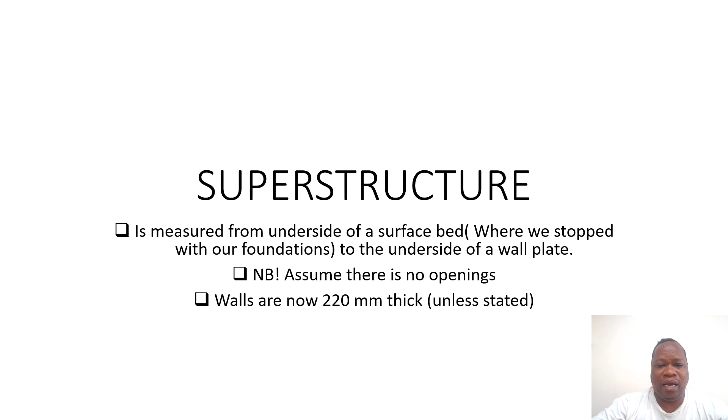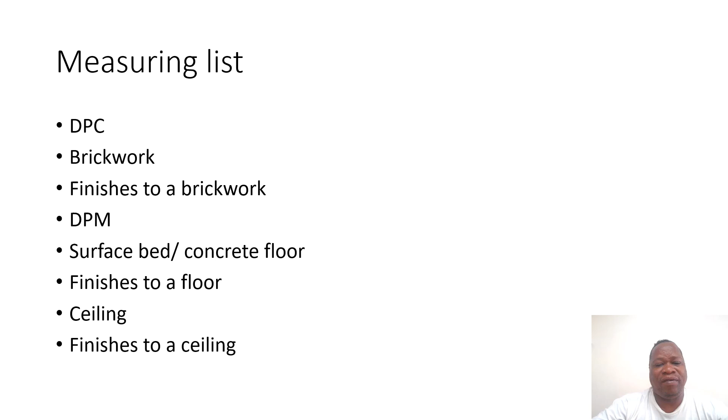Then you need to compile your measuring list. You will start with the DPC, the brickwork, the finishes to brickwork, DPM, the surface bed, the finishes to the floor, ceiling, and the finishes to the ceiling. Once you've determined those, you can measure now.

Here is the drawing showing our structure, and we have to measure the superstructure. The size of our building is 5,500 by 9,500, and the height of our wall is 2,800. Consider that we're starting from the underside. We have our surface bed, which is 75 millimeters thick.

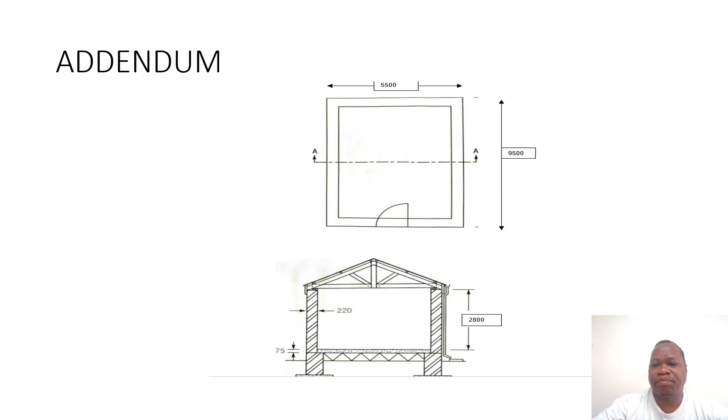On the plan, you are given the specification that you need to go through before you start working out. Your brickwork is in stretcher bond. Your wall is faced outside and plastered inside. You've got the granolithic floor finish. You've got the granolithic floor skirting.

You've got the coved cornice. You've got the rhino board ceiling. You've got H-section cover strips, and then 2 coats of internal PVA on the ceiling and the plaster. And then you've got 15 megapascal concrete on the surface bed.

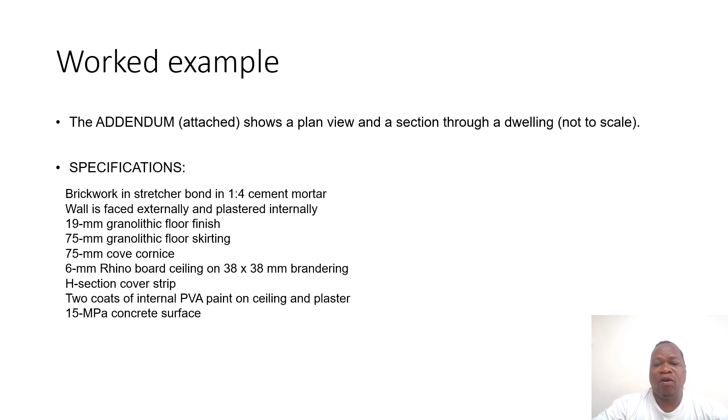Here is our worked exercise. You have to first calculate the center line, bearing in mind that our walls are now 220, not 330. It will give you those dimensions. Add 55 plus 95, times 2, subtract 4 times 220; it gives us 29,120. Then we convert it into meters. When you measure your DPC, you take the center line by the width of the wall and describe it.

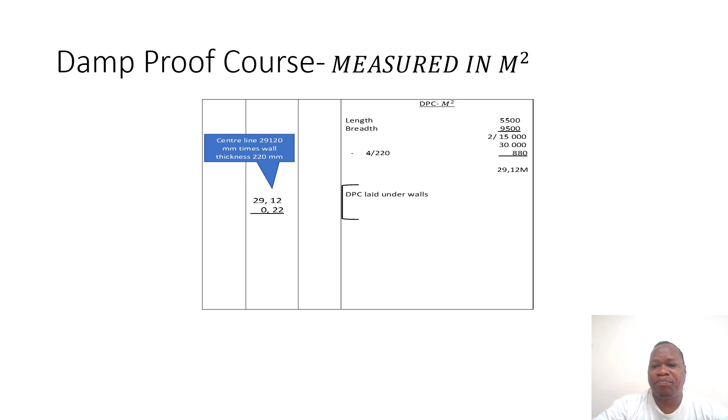Once that has been done, you can measure your sand blinding if it is shown on the plan. I assume that our sand blinding is 20 millimeters thick. I first need to know the area that will be covered by the sand blinding. The dimensions were given external to external, so I had to subtract my walls. It gave us those dimensions.

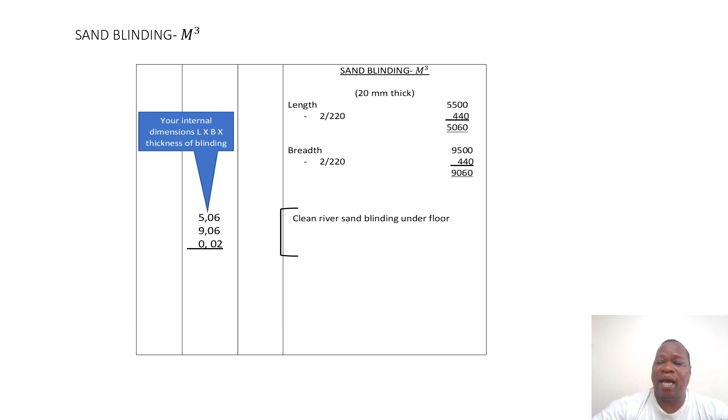That is our breadth. When you're booking it, the standard system says that it is measured in cubic meters, so it will be your internal dimensions as already calculated by the thickness of the blinding, which is 20 millimeters divided by 1,000, and then you describe it as clean river sand blinding under floors.

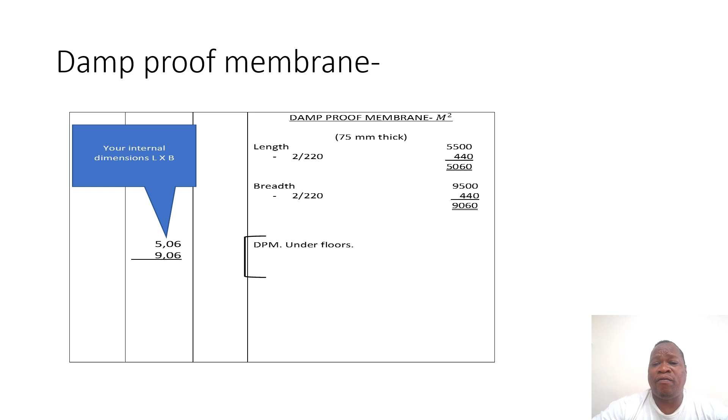Thereafter, you do your DPM. Your DPM is measured by the area that it will be covering. So in the same dimensions, it's your length times your breadth, already calculated. It's a matter of booking and describing. Once you have done that, you measure your concrete floor, which is the surface bed. The surface bed is measured in cubic meters. You already have the two dimensions, your length and your breadth.

The last one will be the thickness of your concrete floor, which is 75. Remember, we are rounding off to 2 decimal places. Once you are done with that, you describe, and then you measure.

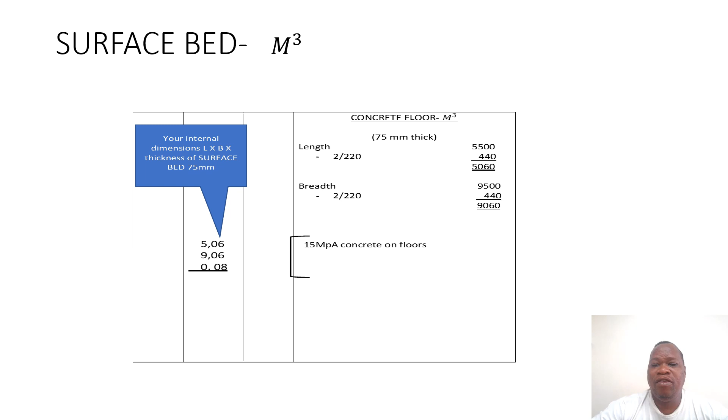The next step will be your screed. But in this case, they say it's a granolithic finish. The granolithic finish is just the finishing done right on top of the concrete, that shiny stuff. But this one now, we need to measure the screed.

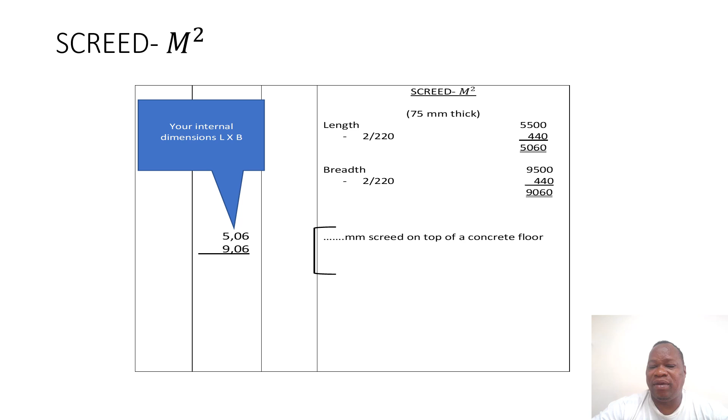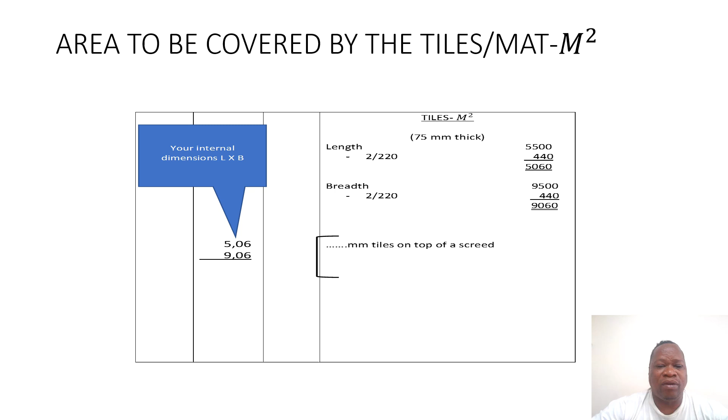Also, the screed is measured in square meters. Then you already have the dimensions. Once you have measured your screed, you can measure the finishing on top of the screed, even though on the specification it says the granolithic. So your tiles again are measured by the area they will cover. So it's the same dimensions as you've done. And thereafter, you start to do the floor finishes.

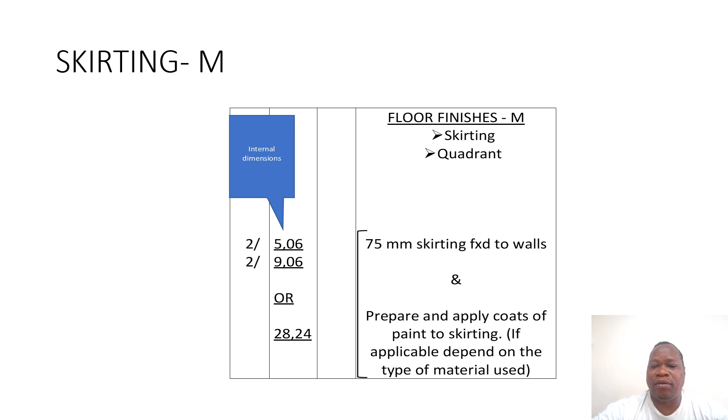Your floor finishes will be the skirting and the quadrant. So both of these finishes are measured in meters. They are linear. So you have two sides that are 5,06 and two sides that are 9,06, and then you describe it accordingly. Or you can add 5,06 and 9,06 and times it by 2. It's going to give you 28,24. So you can use any method that you think will be easier for your understanding when it comes to the calculation of the floor finishes, that is your skirting and the quadrant.

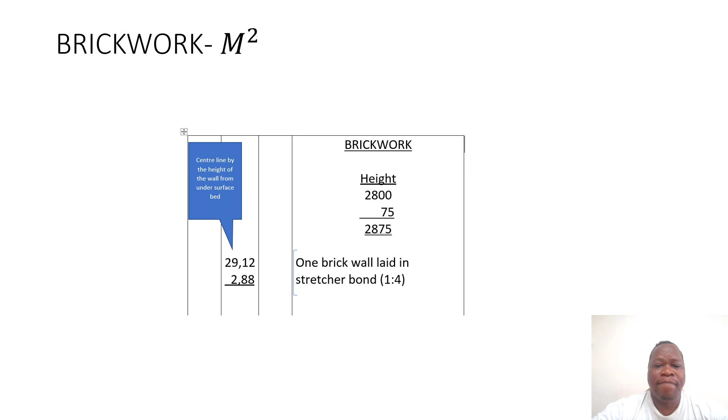Then we go again, the same thing repeatedly. So you have to measure now your brickwork. Remember, with your brickwork, you always start from where you stopped with your foundation. So we added that 75 millimeter for our surface bed, and then it gave us that height. So you take the center line first for your ordinary brick, and then you multiply by that height. And thereafter, you have to measure the finishes to your wall. So the finishes to your wall, you've got internal finishes as well as the external finishes.

So for your internal finishes, you will have those two dimensions by 2.80. That is the height from top of the surface bed to underside of the wall plate. And thereafter, the same area that is in your wall will be the same area that will be painted. Your paint will be applied on those walls. So there's no need for you to rebook this because it's going to be the same dimensions. But if you rebook it, it's still fine. Or if the examiner is asking you separately, then you're still going to be fine.

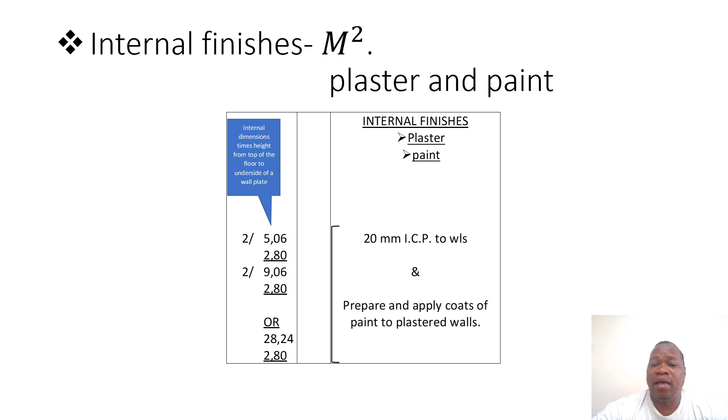Thereafter, once you are done with the internal finishes, you will have to do the external finishes. Now your external finishes are the total external perimeter of the structure. So you add all your four sides there, it's going to give you that 30,000, even though when you're calculating the center line, you've already shown it. So you can do it in two ways. You can take two sides by the height, that is your length and your breadth, same thing, or you take the total external perimeter, it's going to give you the same thing.

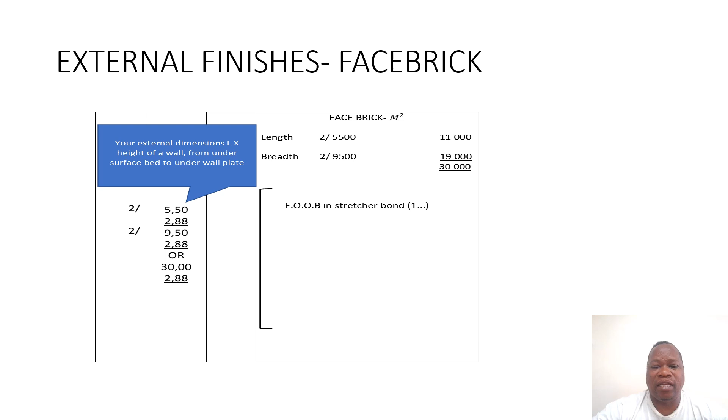Once you are done with your external finish, thereafter you measure your ceiling. Your ceiling is going to be covering the same area as your floors, so it's a matter of you booking. There's no extra calculations there. Also, don't forget to include your paint when you're measuring. Then you add prepare and apply whatever coats they give you in the specification on top of your ceiling.

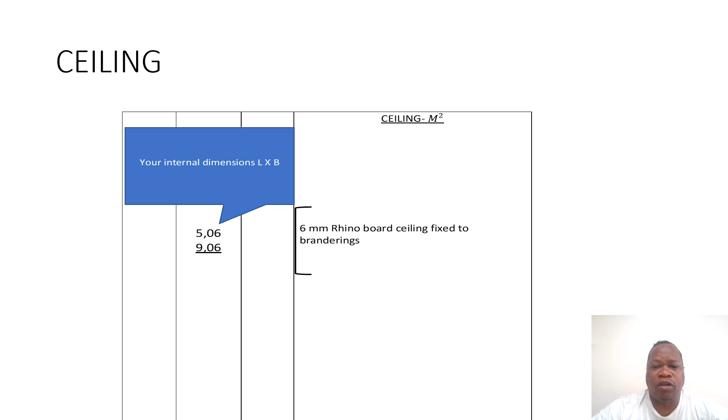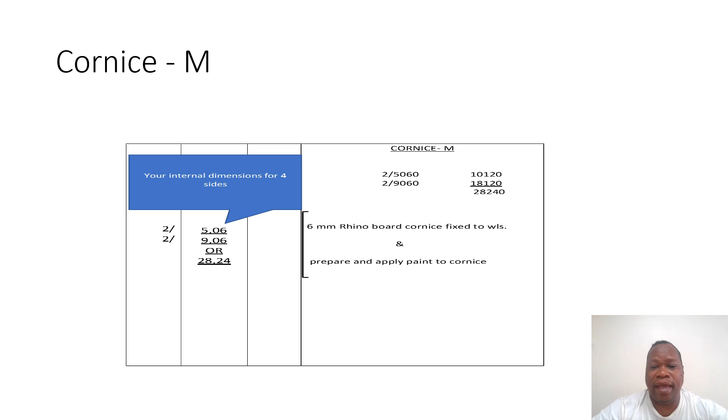Okay, then the next thing you measure is the cornice. Your cornice is measured in meters. So you take the whole total interior of your structure and then you describe it. So on top of your cornice, you will prepare and apply paint in the same area. Then that is all you have to measure in superstructure.